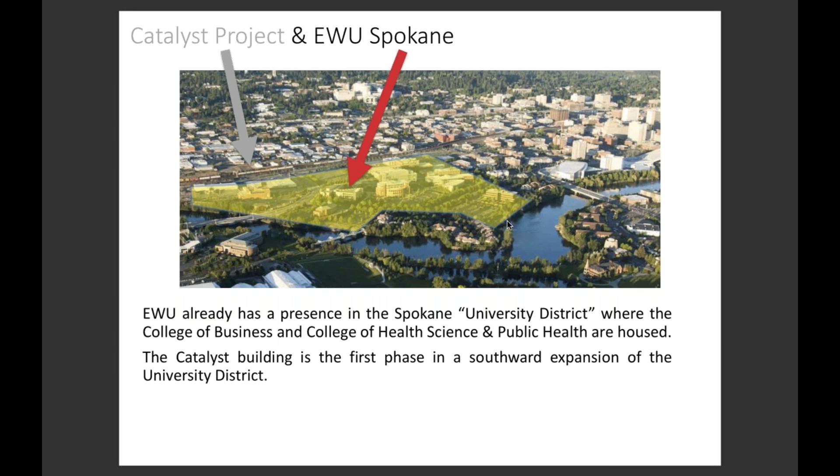It's really exciting, but I also want to share this because one of the interesting things about this development for the region, the university, and local industry is that the Catalyst building is the first step on what they're calling the South Landing. The aerial image is looking to the south, and the university district, where most of our activities have been focused, is actually separated from the southern half of the town by a railroad track.

And the Catalyst building is part of what's called the South Landing project. We are literally the bridge to the other side of the tracks, where there's huge growth in technology companies, which McKinstry and Avista have been leading together. It's designed to be an eco zone with very green industries supporting innovative new buildings like Catalyst.

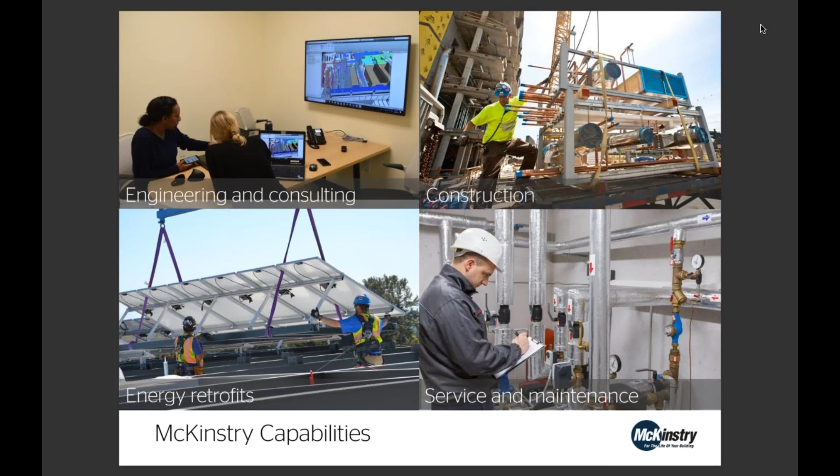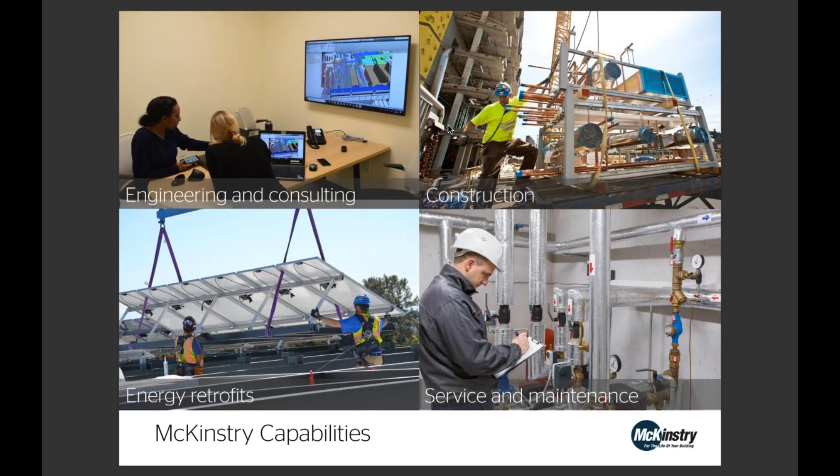Before I dive in, I want to share a little about McKinstry. Folks may or may not be aware of us, so I want to give you some context for who we are. McKinstry is a mid to large size design, construction, and building operation company focused on buildings and the built environment. Our business lines are wide ranging, but we have four main areas of focus.

We do engineering and consulting work—we have about 85 engineers company-wide. The backbone of the company is construction. We do construction at a whole range of scales, from the largest buildings you can think of, stadiums and hospitals and high rises, all the way down to small boiler replacements and retrofit work.

We also have a very large part of our business dedicated to energy efficiency. If you think about the built environment, we can't build our way out of the climate crisis just with new construction. We have to also focus on energy retrofits and working with the existing context, and that's something McKinstry has long recognized—both efficiency side work as well as renewables. We also do service and maintenance work, again ranging from very small to very, very large.

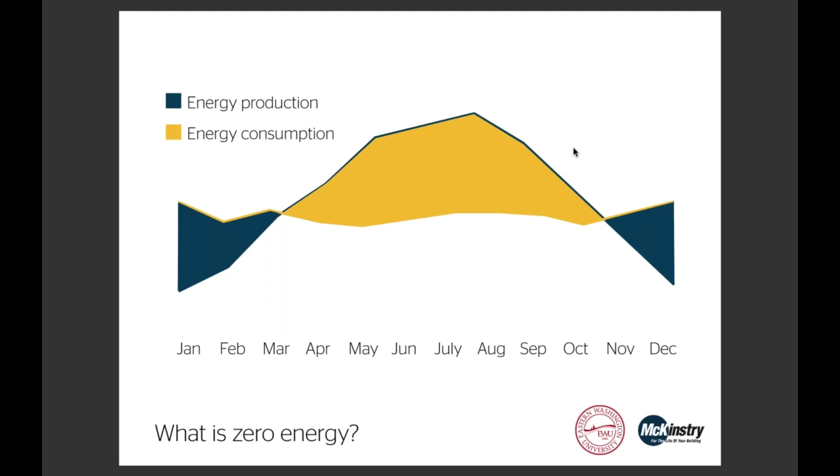The basic idea is that your surplus either is equal to or exceeds what your deficit is in terms of your grid relationship.

I'm going to spend some time talking about what's good about this. I think to a certain degree it's self-evident, but there are a lot of benefits to zero energy buildings beyond what's immediately apparent. One thing that's really great is that to live within the means of what you can generate on site, you really have to get tremendously efficient. We're not talking about just taking a normal building and putting solar panels on it—only a handful of buildings could actually be net zero that way. To live within the means of that solar cap, you really have to drop your energy use dramatically.

About three years ago, I wrote a book called The Power of Zero. In that book we looked at 20 case studies of actual energy performance and how zero energy buildings actually achieved zero. If you look at this graph, the orange is an average office building's energy use, and on the right is how all the zero energy buildings in that book performed. You can see the average is around a 70% improvement over the norm. So zero energy really drives efficiency, which is fantastic.

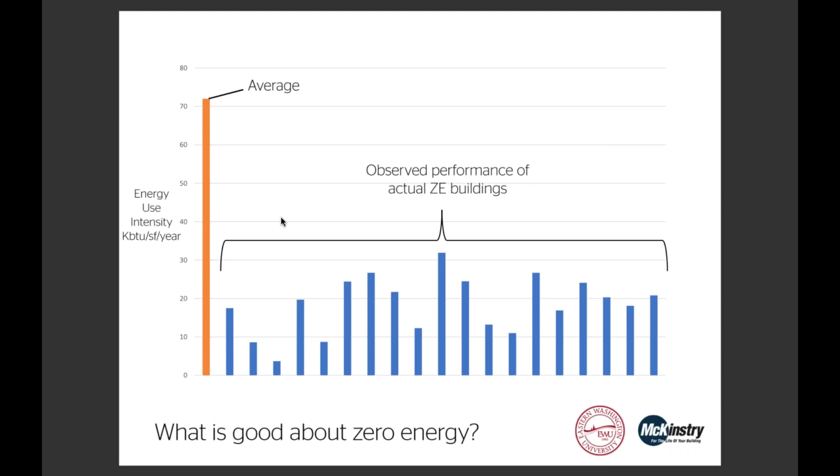I also want to share a bit on zero energy versus zero carbon, and a new generation of thinking around zero energy buildings. One thing that became clear to those of us in the zero energy movement two or three years ago was that the sample size of buildings that could actually achieve zero energy, even if extremely efficient, was limited to less dense and less intense building uses. Things like high rises, hospitals, labs—there was no way those buildings, even if tremendously efficient, could generate enough power to offset their energy use.

So a new pathway was created through the Living Future Institute, the certifying body for zero energy and zero carbon buildings, allowing off-site renewables. That really opened up the floodgates for these higher intensity and higher density uses.

Just to be clear, if you have a high intensity building like a hospital or lab, there is a pathway for you. And with zero carbon, there's also a pathway. Zero carbon is very similar to zero energy - some of the energy requirements are less stringent, but zero carbon buildings also look at the carbon embedded in the act of constructing the building. That's really the differentiating feature of a zero carbon building. I'm going quickly over this, I'm sure people are saying yes, but...

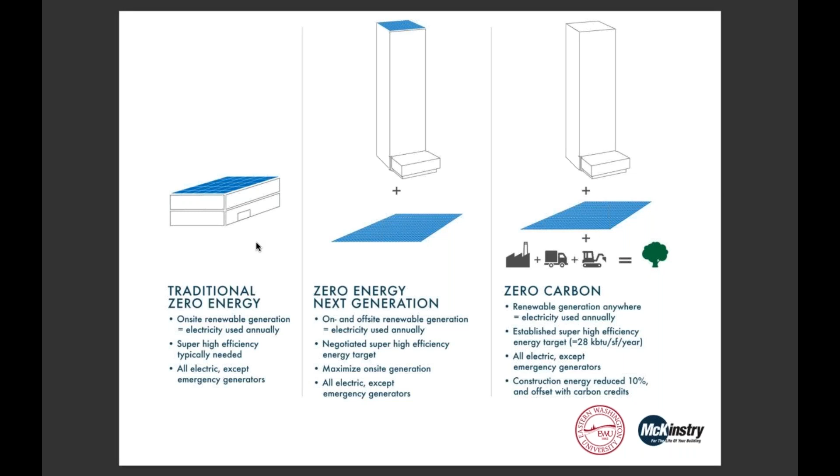So big picture, this is the energy roadmap of how we get from a typical building to a zero energy building, specific to Catalyst. Think about heating in a typical building - it uses a boiler, doesn't have very good insulation, so it uses a lot of energy to heat, represented in dark blue here. Note how much less energy we're using in Catalyst for heating. It's amazing. Next slide we'll talk about how we're actually doing that.

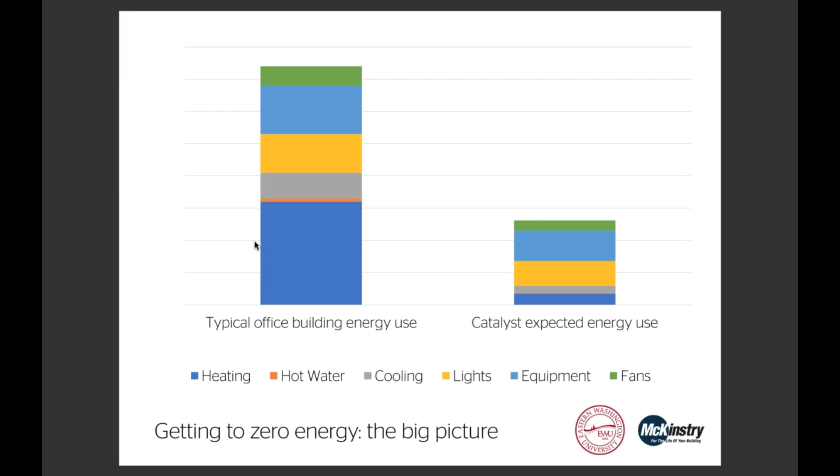Dean Bowman already talked about the big picture of Catalyst and South Landing. Just to be clear, we're talking about two projects in one. The McKinstry ownership team wanted to create a catalytic example of what we believe is possible in the built environment. They're developing with regional partners like Avista Utilities a high-tech campus that includes a zero energy building - that's the Catalyst building.

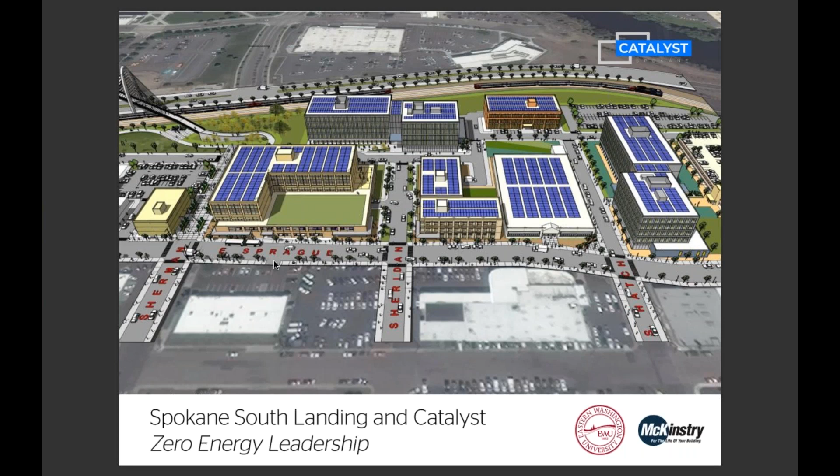I could talk at length about that, but I won't. We're starting to see very high, tall buildings built of wood in different places, and they've been able to address the fire concerns associated with it. Next slide.

This image shows how the panel assembly comes together with cross-laminated timber, but the reason I wanted to show this was to talk about insulation in the building. Our buildings in the past have been quite primitive about how we've insulated them - we've basically taken the structure, put insulation in the gaps, and called it good. That's like, well, that's how much insulation we can fit in there. The reality is that doesn't get us to an optimal level of insulation. You have to go further than that, and there's a lot of opportunity there.

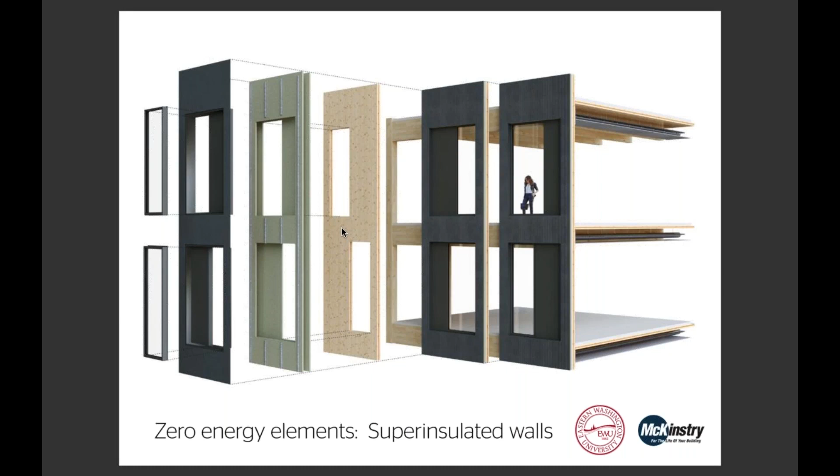Another interesting element is buildings are probably far more leaky than most people recognize. You'd assume when a building is built there wouldn't be air gaps or seams or air leakage, but it's actually quite prevalent. The average home exchanges air with the outside about every 4 or 5 hours. Commercial buildings are typically better than that, but still not great. So one thing we'll be doing is air sealing the building to a very high performance level - to a passive house standard, for those who know that.

I'm not going to do a real deep dive on this, but just to show you the differences between the mechanical systems of a typical building versus the Catalyst building. A typical building has a mechanical system that's massive and kind of does everything.

It cools, heats, and ventilates, all in one package. So if just a small part of the building needs heating, cooling or ventilation, you have to crank up that big thing, which on many buildings is literally the size of a locomotive. To provide a small bit of service, you're using this huge machine. It's very inefficient.

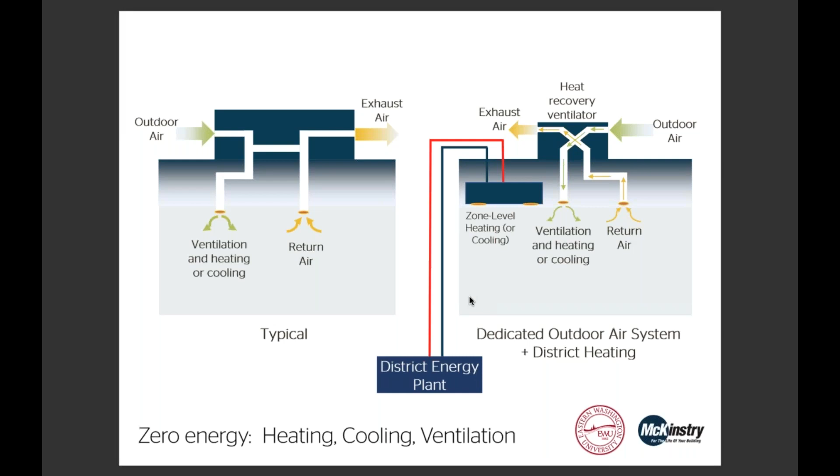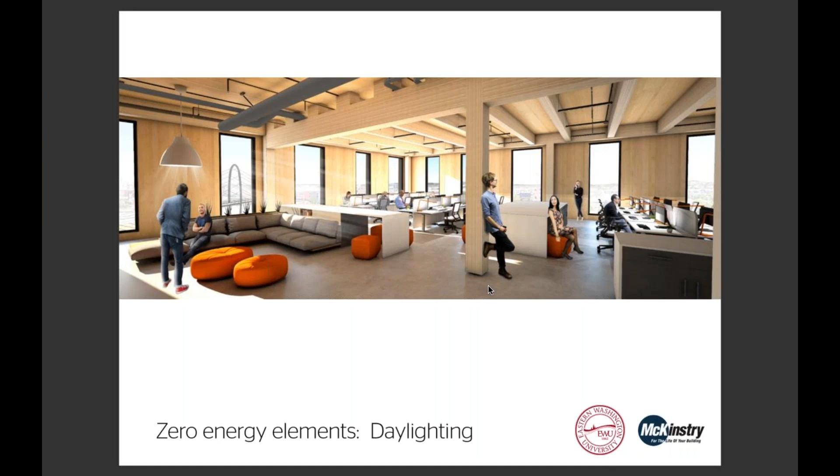Daylighting is a very important component. Lighting is very important, people like to be in daylit spaces, and it's an energy saving measure. So we're taking that very seriously at Catalyst.

I'm just going to wrap up and talk briefly about our district energy system. As mentioned, Catalyst will be served by a multifaceted district system that uses 7 different heating and cooling components to make for a super efficient system.

This next slide is definitely my geekiest slide of the whole deck. Bear with me, but this shows over the course of 12 months how those different components are contributing to heating and cooling in the building. That's about all I'll say about it.

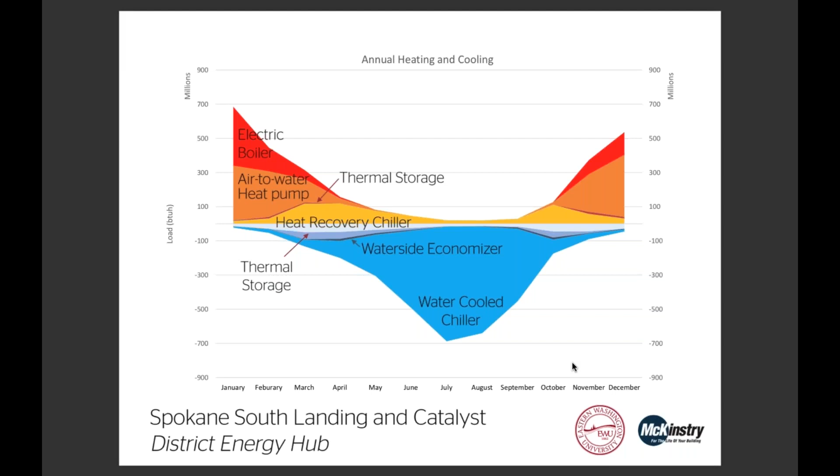But if you take all those systems in aggregate, it's 4 times more efficient than a typical building heating and cooling system. We're able to capitalize on different efficiencies and use extremely efficient systems, which is quite tremendous and really helps us get to zero energy.

Another aspect that makes the district system compelling is that by serving 5 buildings, we're able to do some things with it that you probably wouldn't do on a single building. You could do some of them individually, but probably not all.

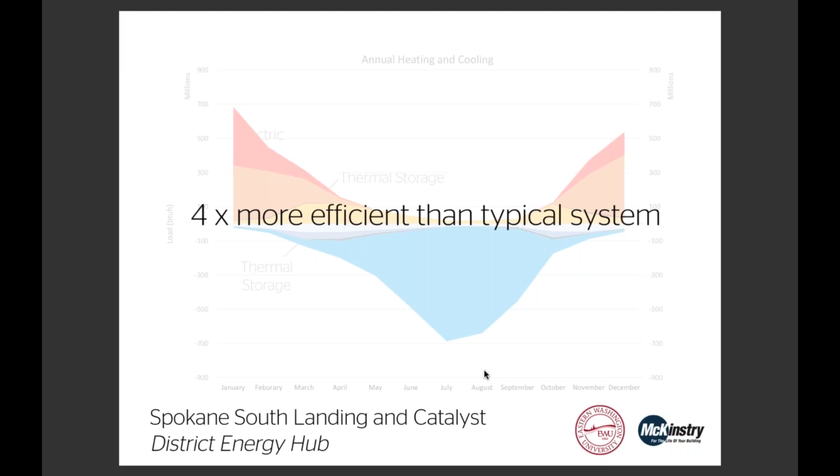I have just a couple more slides. We do have renewables on the roof, as well as off-site, so this building will use that off-site pathway I was talking about.

I just have a couple photos of construction. That is the Catalyst building, a couple weeks ago, not as recent as Dr. Bowman's photos.

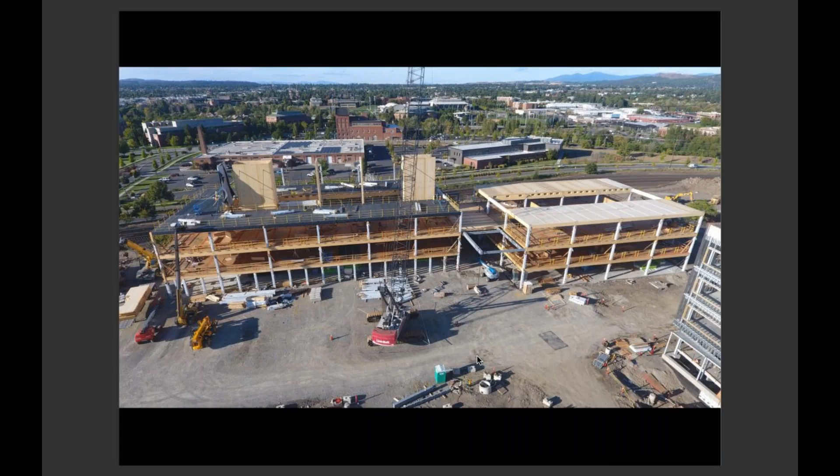This slide shows where the district energy system will be, down in the bottom there. And one thing I didn't talk about is plug-in user loads, and Dean Bowman is now going to talk about those.

Thanks, Brad. It's a really exciting building, and it's very exciting to have electrical engineering in particular moving into this, because it's kind of a living laboratory for them in many real ways.

It's something we need to think carefully about as we move into a zero energy building - how do we do this? I think the most critical element was really the choice of what we're going to do. Brad is absolutely correct, you can do very high intensity things in a zero energy building.

But we wanted to be very careful and focus within the constraints we have with the hub building and on designing that South Landing area. So we really focused on programs to move that did not have wet labs, did not have fume hoods. We didn't want shops that are very energy intensive and not necessarily always very efficient.

We really wanted to work on our curriculum itself to be efficiently used within the building. We needed to focus on minimizing our curriculum so that what we're teaching really focuses on what's needed for those designated programs, and really use that opportunity to maximize how much work the students are doing with outside industry partners.

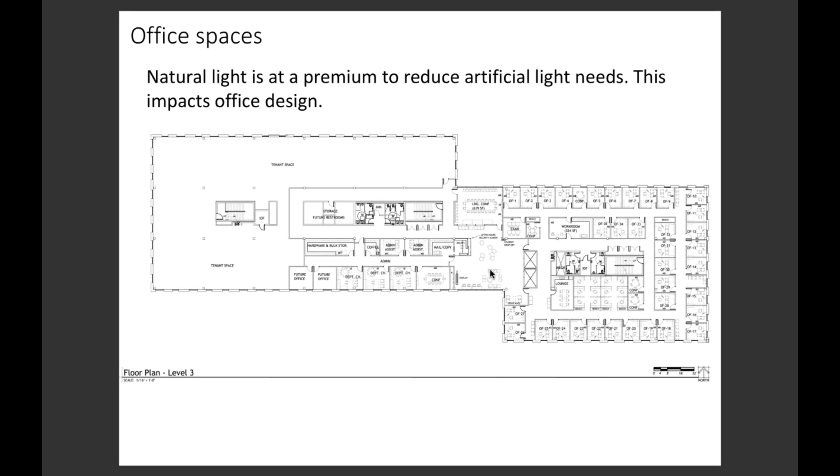So it was very important to us that privacy in particular be maintained as paramount for the administrative offices, for the department chairs. They not only have student issues, but also personnel things that they deal with, budgetary issues. And so that portion that we see right here is the only portion of our office space that has traditional sealed offices with, when you look up at the ceiling, you see a roof. We've limited really just to those administrative spaces, which forced us to move them to the outer walls of the building so that they would have access to the daylight. It also had a big impact on how we structure where things are, and I think it's a good thing.

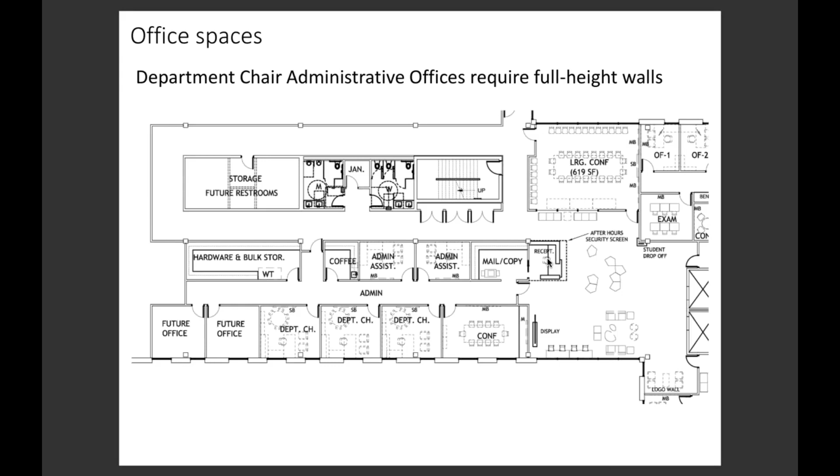If you go to the next slide, the office spaces for the faculty are not full height walls. And that has a lot of implications. If we go to the next slide.

We had to build mock-ups because we needed to also gain trust from the stakeholders, that they could sit in this office and have a very loud person like me in one office and not be impinging on or be able to be heard by people in the next offices. And McKinstry has some really neat high-tech ways that they're doing this using drop-down ceiling tiles. If I have the next slide.

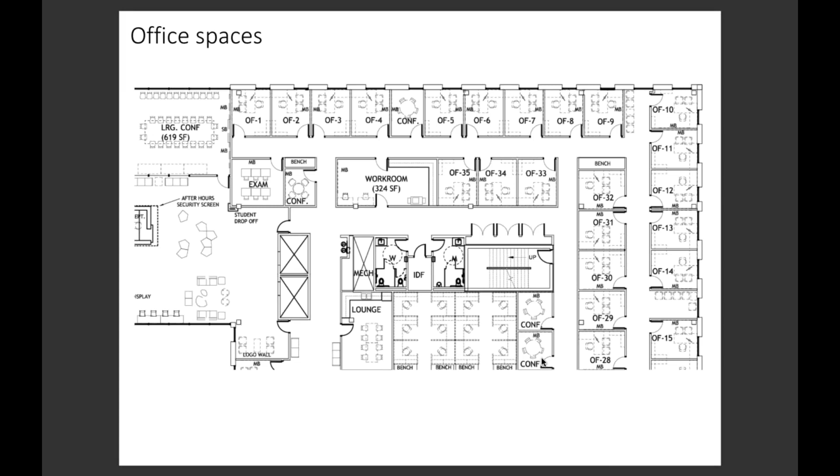So because the sound insulation is not 100%, we've also provided new spaces for faculty to have confidential discussions. You will see, before I get to that, not all of our spaces need to have that same level of confidentiality that the tenure track faculty have with their students. We have a lot of adjunct faculty here, and it's something we hope to see increase by being downtown.

So most of those faculty we have in cubicle farms. The walls, this is something we're working on right now. The walls are going to be a little bit higher than that to try to promote the privacy as much as possible, but this again really helps us focus on our energy usage.

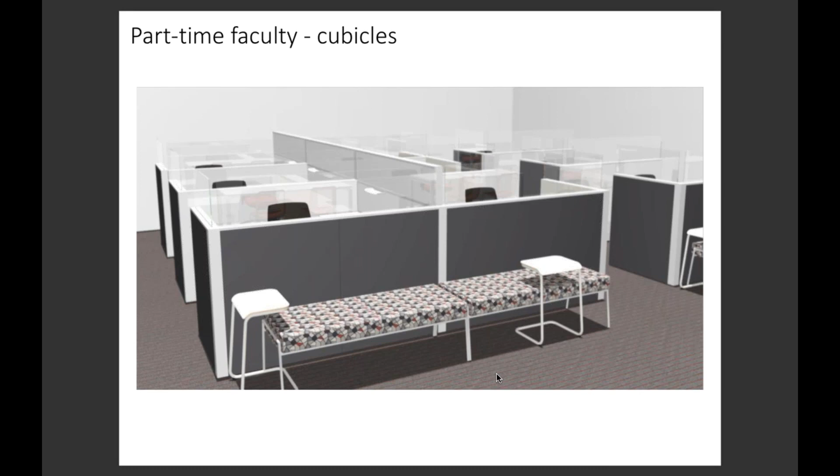Next slide. And that's something that I'm sure many of your universities are already doing with adjunct faculty and graduate students. But because of that, we've put throughout the office areas of the building these small conference rooms. And that's a bit of a culture shift for us.

And that is so that if a faculty member has office hours, that they know they're going to have a lot of people, they have a place that actually is sound insulated. These conference rooms actually have a hard cap ceiling to provide a sound proof area for confidential discussions or office hours, things like this. And that allows them to leave the area where you might have sound leakage into the next room and still be able to perform that function.

That was a really important innovation, if you will, in terms of the design of the building to permit that happen so that we can minimize the energy usage.

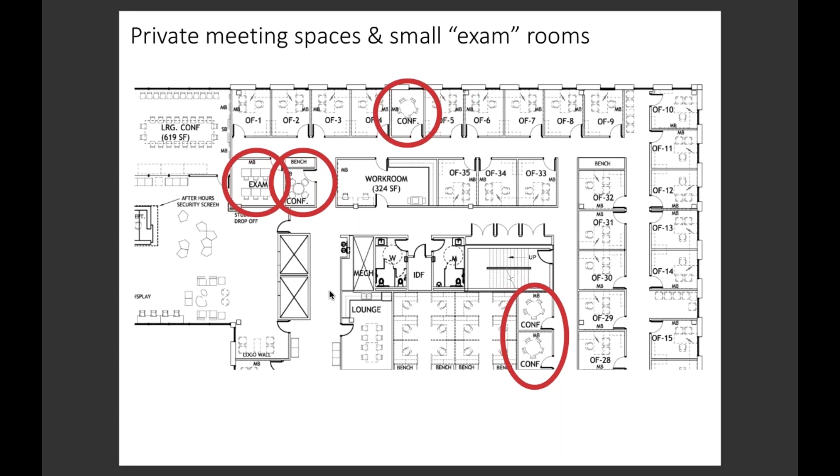So I think the key takeaway in the short time that we can on this that I want to emphasize is it's really that change is really important that we've done in trying to live within this concept of zero energy. It's really facilitated a lot of important discussions that are good across the curriculum, updating equipment, updating our curriculum, focusing our support services, and really modernizing all of our policies for space usage. So not only are we going to have a better building, but I really do believe that this is going to lead us to better programs that we're going to be offering to our students.

And you can move to the next one, Eric. That's great.

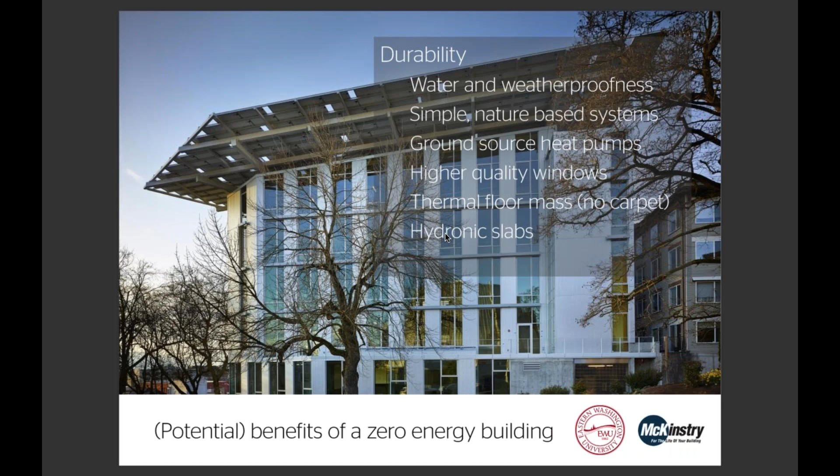So if you think about 250-year legacy buildings, zero energy and higher ed really fit together.

And then another really great benefit is, think about it: in a time of crisis, let's say you have no power inputs to the building. If you design the building right, with good daylighting and good insulation, that building might actually be quite occupiable in the event of no power, and it provides the fundamental meaning of shelter.

I just want to talk briefly about campus level planning and zero energy. This will be really quick, but if you think about a campus doing a zero energy or zero carbon campus—covering all the consumption and all the production and offsetting all of it—many of the folks on the phone have that as a goal. It's conveniently a couple decades out, but we've got to be thinking about it now.

So just to share some high-level thinking about this: we do a lot of campus planning, and I think it's really important that your zero energy planning can't stand alone. It needs to be incorporated into the rest of your planning. If you're really going to get legs with your facilities group, your construction group, your capital group, think very big picture about it and take into account everything in how you're doing it.

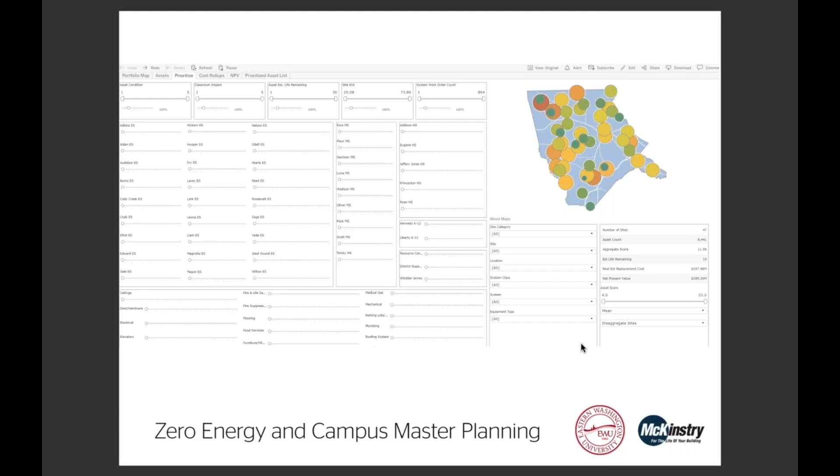This is some facilities assessment work that we do where we look at a whole range of things—not just site EUI, which is the energy efficiency part of it—but there's all these other elements you can take into account when making decisions about your capital facilities and what to hit next.

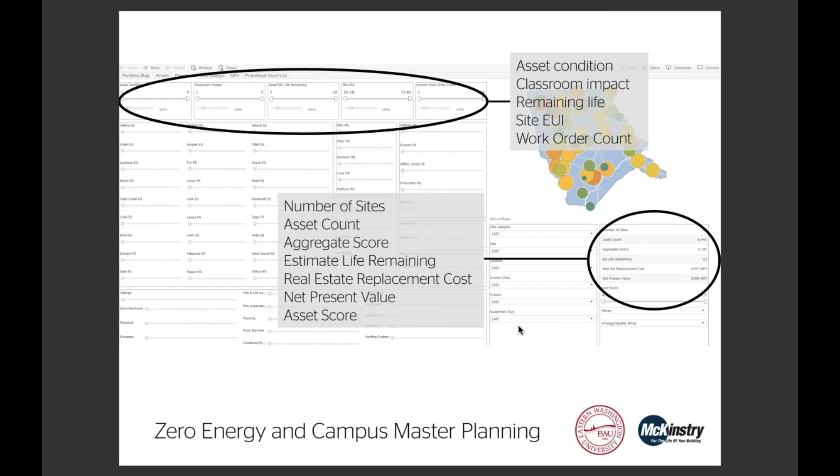This is another example, actually a hospital, where we're looking at things floor by floor and literally room by room.

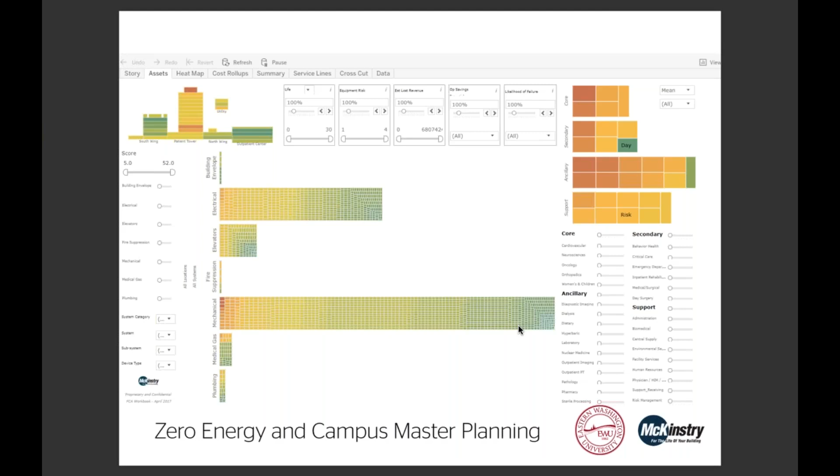And just at a high level to think through: with higher ed, again, you're not going to rebuild the whole campus. To get to zero energy campus-wide, you have to take a very strategic, thoughtful approach in how you're dealing with all of the buildings—how far can you go, and what makes sense to do on different buildings.

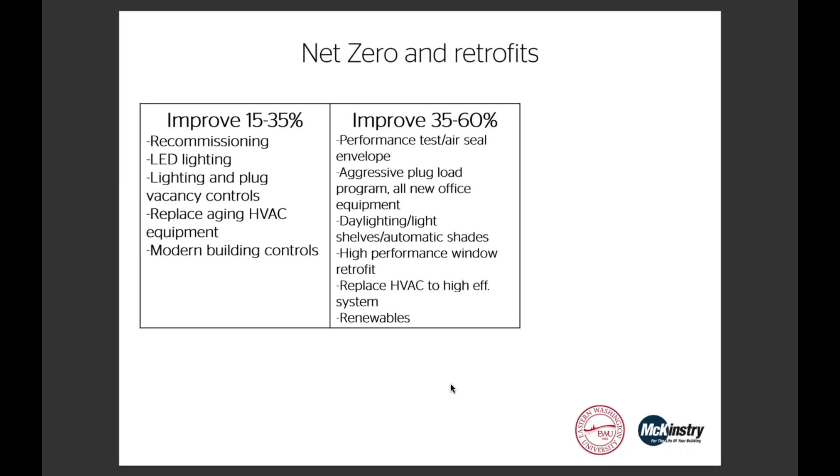So if you think about it in terms of how far can you push buildings—some buildings you can take a light approach. Some buildings you can take a deeper approach, where you're getting really aggressive, maybe getting into the envelope of the building, but you could get really high results through that. And then finally, in some situations, you might just use the shell of the building but gut the whole building, use the core of it, and really start over and almost treat it as new construction.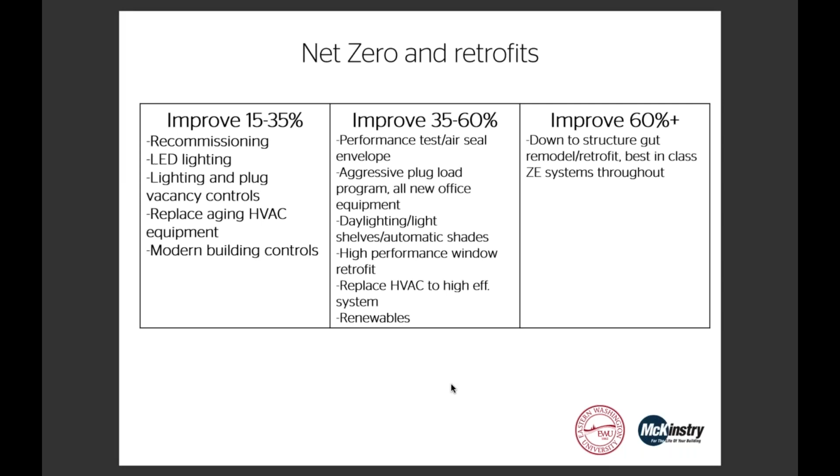This is just something to stimulate some thinking: a lot of the time folks will say, well, how much does zero energy cost? And I think people approach this far too primitively. The capital costs can be more—not necessarily, you can have trade-offs with other things and just say we're going to prioritize this. But to simplify things, I want to emphasize the benefit of no utility bills accruing over 20 or 30 years is really substantial, and it will always—I guarantee you—offset the increased capital cost if you're doing it thoughtfully and making sure you're capturing all that utility cost benefit.

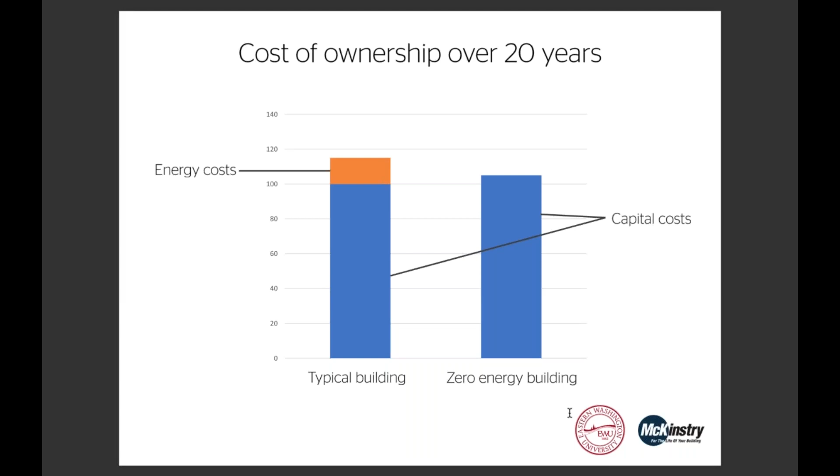I think this is particularly important: we're dealing with a dynamic situation often in fundraising around new capital facilities. If you go further, you can actually benefit the building because if you say, hey, this is a zero energy building, it's going to be the first in the state, it can actually be a way to get great fundraising and reduce the amount of indebtedness you need to take on.

There's a college I was working with on the East Coast where we had the design charrettes, and they said, okay, now we're going to go fundraise. I thought, well, we'll talk to them in a year or two. They called us back in a month because they found a single donor who was like, this is so cool, we're going to pay for the whole thing. That's a very real phenomenon worth paying attention to.

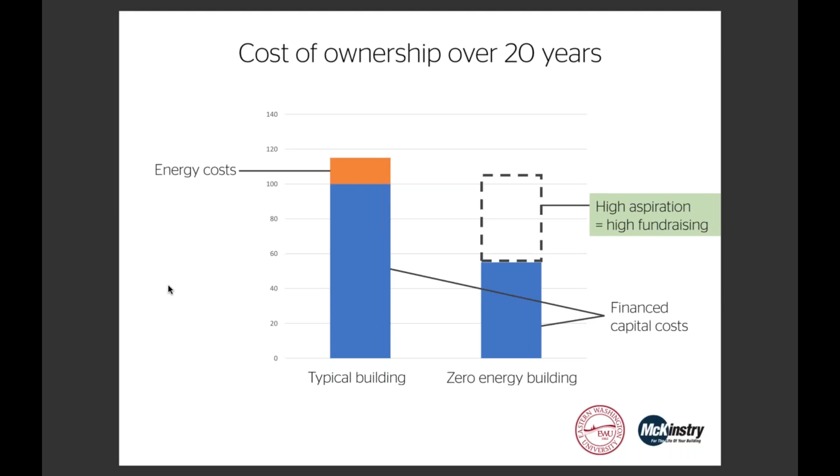Last slide. I just want to challenge everybody. I think one thing that's really important on campuses is you may not be able to have every building be as stellar as what we're doing on Catalyst, but you could have one or a small handful of new construction projects. Use that building to be a catalyst for reconfiguring your whole approach, along the lines of what Dean Bowman was talking about. Thanks, and we'll jump into questions.